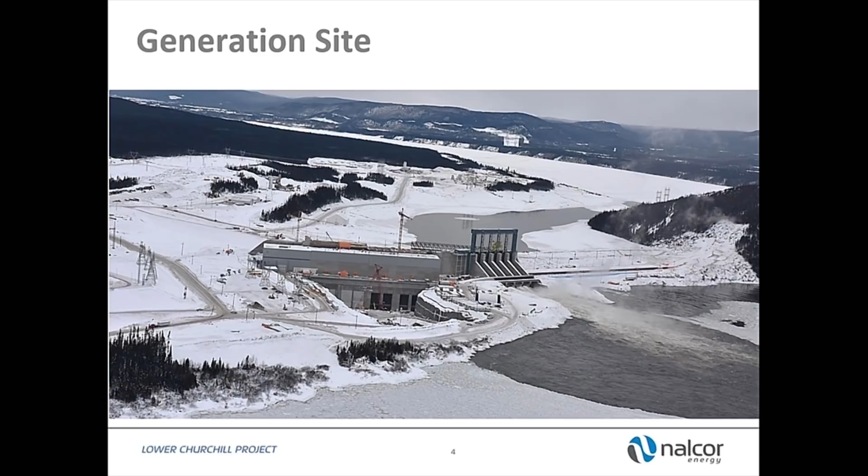So this is 30 feet below the level of the river. The river is about an elevation of 4 or 5 meters above sea level. As you see it now, the water's been backed up just above the upper falls, to a level of about 24 meters, 22 meters, where it's starting to build up back into the river and on the North Spur.

People think the North Spur contains all the water. It doesn't. Half the head is from here to here before it even backs up into the North Spur. But this was a natural flow. It's been diverted, which allowed us to work in the river this year. We've done that. We're ahead of schedule.

The other thing I should point out, there's a lot of water going through this river. There's about 30% more than goes through the upper Churchill because there's tributaries downstream. But the head is very low. The head in the upper Churchill is about 1,000 feet. Here it's about 100 feet.

When this reservoir is full, the upper level will be about here, and the lower level is right here. It's 100 feet. So when this is finished, this plug will be removed. The water will come up to about this level here, and it will be coming in through the turbines and being discharged. So it's a very low head plant, very high volume, as contrasted with the upper Churchill.

The flooding is very little. You can see the banks of the river very high on the other side. You can also see where there's been slippage, and there's basically sand and soil. This has been giving away since the last ice age, thousands of years ago. I'll show you some pictures downstream a little later. Very little flooding.

Now, the capacity of this plant: there are 4 units of 206 megawatts each, for a total of 824 megawatts. That's the maximum it can produce. It won't be producing that 24 hours a day, 7 days a week, 52 weeks a year. On average, it's going to produce 4.9 terawatt hours of energy.

There's been total confusion between capacity and energy. There's 8,760 hours in a year. If you multiply that out, at 100% capacity it would produce over 7 terawatt hours. So on average, it's going to operate at about 550 megawatts. It'll operate at full capacity probably in the spring freshet, because 30% of the flow comes in downstream of the upper Churchill, which there's no control on.

The control is on the upper Churchill. In the winter months, Hydro-Quebec wants us to run that full out, and then later on in the year we cut back. So that will dictate how we operate on a day-to-day, week-by-week basis.

Just to remind you of the sanction number, the number I gave you last year, which is still the number I'm using. Remember that initially we're basically 2 years behind on the power, and also that Emera is entitled to about 20% of the energy for 35 years because of the Maritime Link, with an additional 5% for the first 5 years. Out of this 824, they're entitled to about 165 megawatts off peak. So when the power is at most, they're entitled to about 165 megawatts, which works out to about 1.4 terawatt hours. You should also note that this is not new capacity to the island.

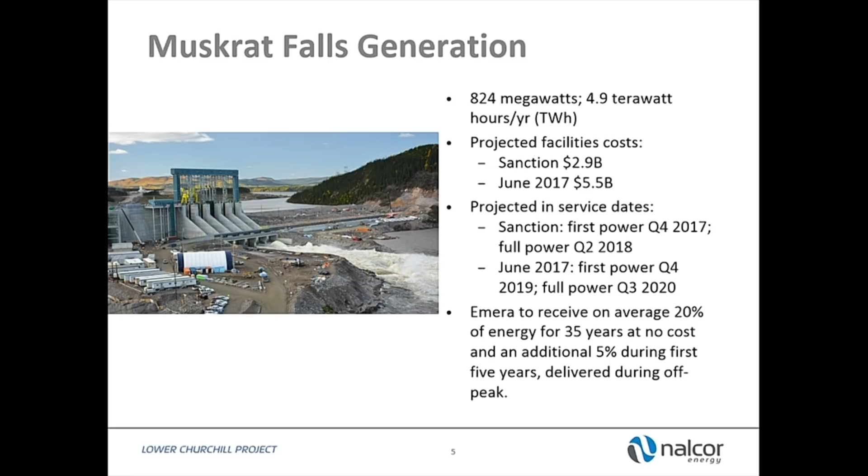The first thing is there are line losses. There's about 70 megawatts lost transmitting from the power plant to Soldier's Pond. Then you've got the 165, 170 megawatts going to Emera. And we're shutting down Holyrood, which is 490 megawatts. Holyrood, on average, probably produces 1.5 terawatt hours of energy in an average year. So we're replacing a thermal plant with a hydro plant. Net, you're probably only gaining about 100 megawatts in terms of capacity. You're going to gain a hell of a lot of energy, you'll see later, but there's only 100 megawatts of capacity, which limits the value of the energy you're selling because you can't sell it on peak normally.

It also means that while we have a lot of energy to sell, we can't bring in these big processing operations, the Bitcoin mining things, which operate 365 days a year and use a massive amount of energy but also require capacity. We have to target what we're going to do with the excess energy to maximize its value.

So what have we done last year? North Spur, we'll talk about later on, but the work is finished there. The South Dam, which I talked about earlier, you can see it here fairly clearly. There's an earth-filled dam, you can see the top, you can drive a truck across it, which you do now to get over here. That's done. The powerhouse is enclosed. The boom has been put up for the winter and for safety. The North Dam is 40% finished, ahead of schedule and within budget. It's been a great year. Overall, we're 78% complete.

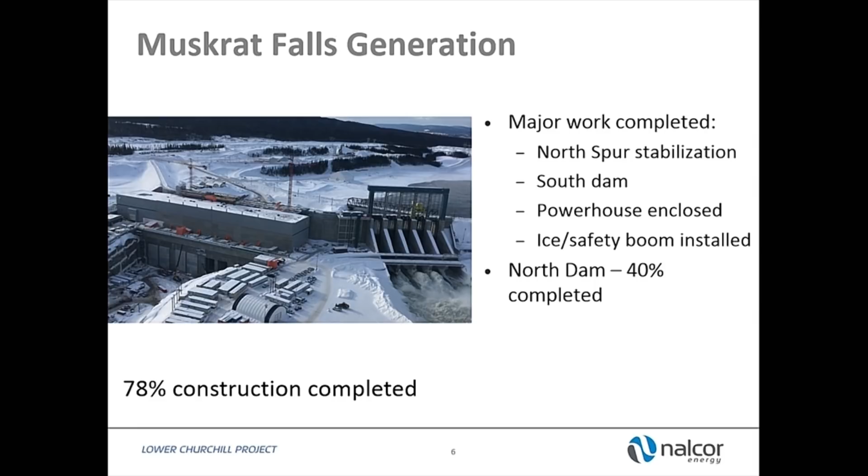What we're seeing now is a transformation. Up to this point, the big focus has been these big outdoor civil works: pouring concrete, putting up big towers out in the swamps, stringing lines, blasting rock, moving soil, all exposed to the elements. The only piece left like that now is the North Dam - hang on, let me go back - which is not in the critical path, has a schedule, no problem. So we're transitioning from those big civil works out in the cold, exposed to the elements, to putting equipment in, doing terminations, and testing things inside. Like in the powerhouse now, the biggest part is putting together the turbines and whatnot. Yes, there's some concrete, but we're working inside, and even though it's, say, 0 degrees Fahrenheit outside, it's 10 degrees Celsius inside.

The other work is in the terminal stations inside. A big transformation - our workforce peaked, and we're going from 5,000, maybe down this year to about 1,200. The camps are no longer needed.

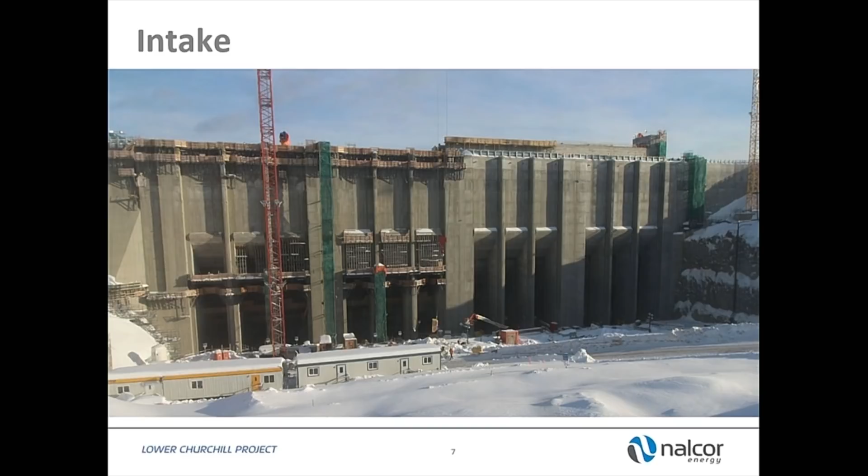Now, just to show you what this is all about, this is the intake to the powerhouse. There's actually a big hole down here. They're still doing some work up on top, not in the critical path, where the gates are - these are the gates which open and close to let water go through the turbines. When the reservoir is filled, the water will probably be up to here. So you're looking downstream now at the intake. Now you're downstream looking up, back where that berm was, protecting from the river downstream.

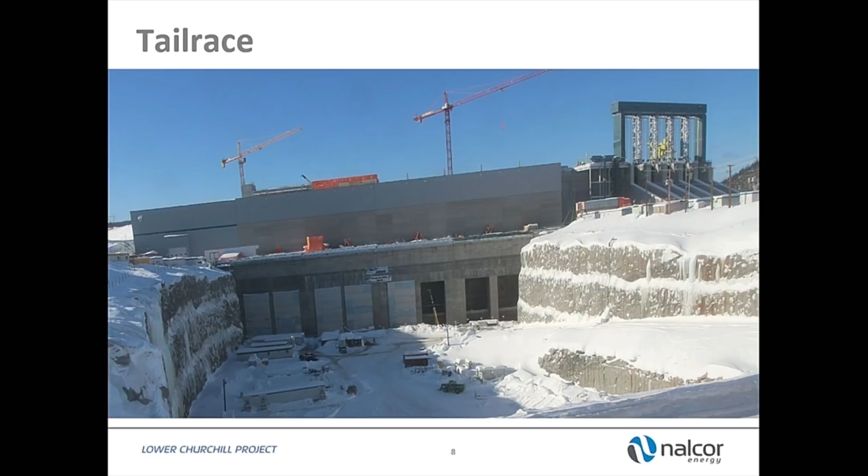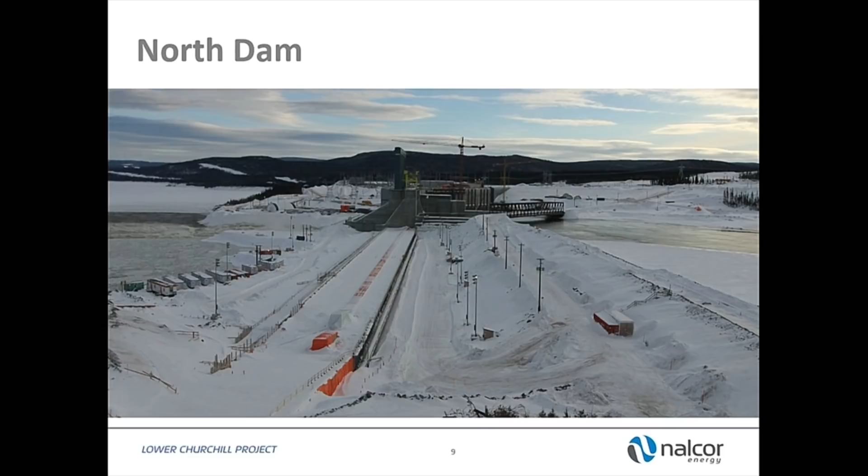Now we're looking inside. This is inside the powerhouse. There are 4 units that I told you earlier. Unit 1 is here. You can see 2, 3, and 4.

This is Unit 1. You're installing the liners into the spillway. The turbines will go about right here in this one. So they're working on all 4 now inside.

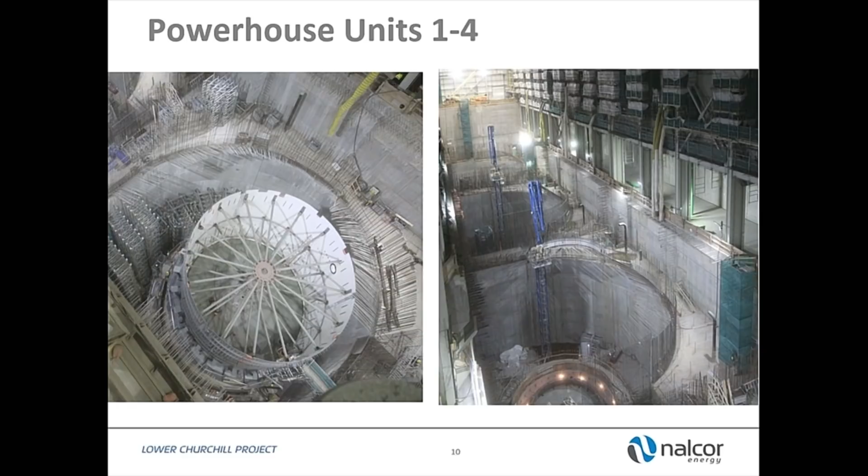It goes back and forth between the 2 contractors. Andritz, the turbine manufacturer, installs their liners and whatnot. Astaldi comes back and pours cement, and they hand it back to Andritz. Back and forth, back and forth. But it's inside, under control. They're working on all 4 units.

What's that? I think right now we're up to 22 meters. We're going to go to 39 meters. Say 50 feet. The water retained behind the North Spur is about 50 feet.

And it could have flooded the works. It didn't, and now we're in good shape.

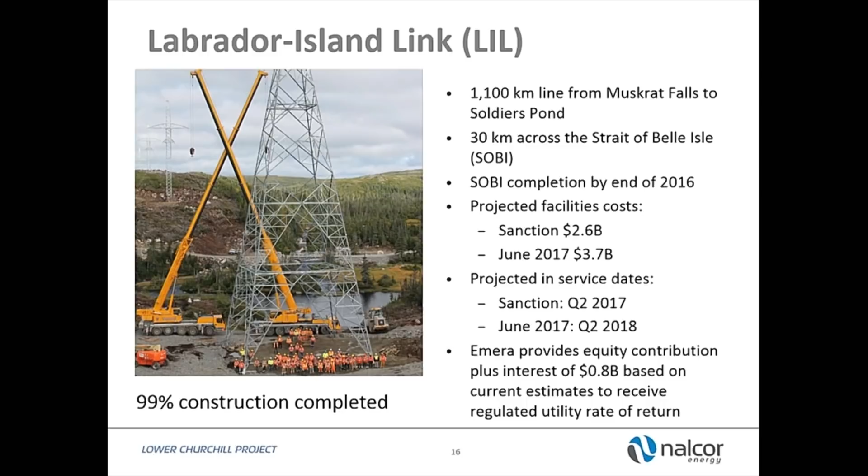I think this is the last tower. You can see the tower's size relative to the people. These are huge towers. You've seen them going across the island. There's two main lines, DC, along with some grounding wires and whatnot, and communications cables.

These are solid-state converters, which means we have a lot of software, which is one of our big risks now. We have people in London, England right now, as we speak, working on this. Software risk is a big risk we face in the next few months. Will the software work? We've been doing a lot of work on it, but you see how our risks have changed. We're no longer worried about working out in the snow and the rain. We're working inside, terminating things, working in offices, getting billing software.

They're like flywheels, electrical flywheels in a sense. They provide the momentum to keep the system stable. We're also going to use at least one of the units at Holyrood as a synchronous condenser to provide more stability — we might even get two. But they're not going to generate energy, they're just going to keep spinning around and give what's called reactive power, stabilizing the system.

Not only is this finished, it's energized. So all the lines coming from Bay d'Espoir, Western Avalon, and Holyrood are now coming into here and into the city. This has been turned over to Newfoundland Labrador Hydro. This is a control area here — this is operational. This is being finished as we speak.

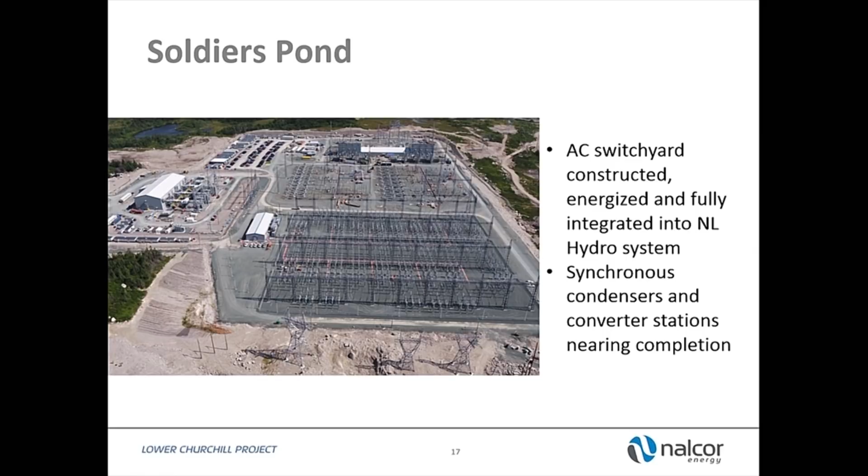So the power comes in, is converted to DC, 350 kV, and is sent to Soldiers Pond outside of St. John's, going across the Strait of Belle Isle. Again, we're in the process of energizing and switching these areas.

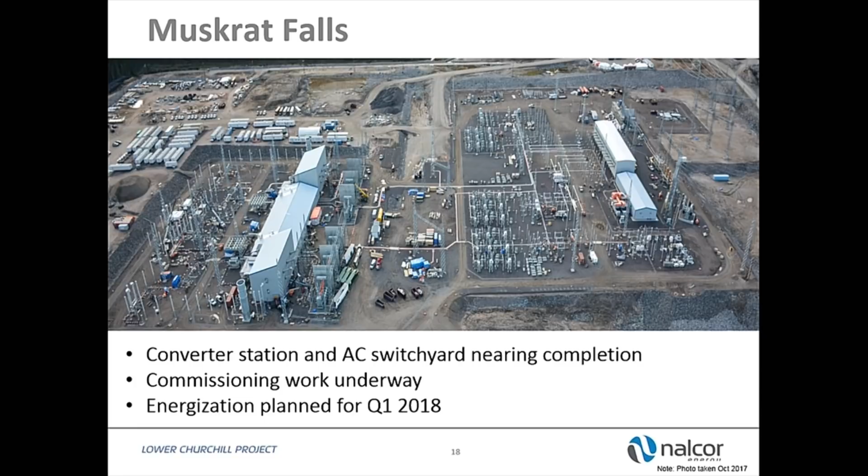Going back to the connection from Muskrat to Churchill, again, this is finished. What we did actually last fall, we weren't ready to energize the whole thing, but the old line going from the Upper Churchill to Goose Bay was falling down, and we jury-rigged part of this line to feed from Churchill down to Muskrat Falls, and we're actually using it to feed into Goose Bay. As you'll see later on, we're now going to, in the future, feed Goose Bay from Muskrat Falls. Again, the numbers I gave last year are still valid.

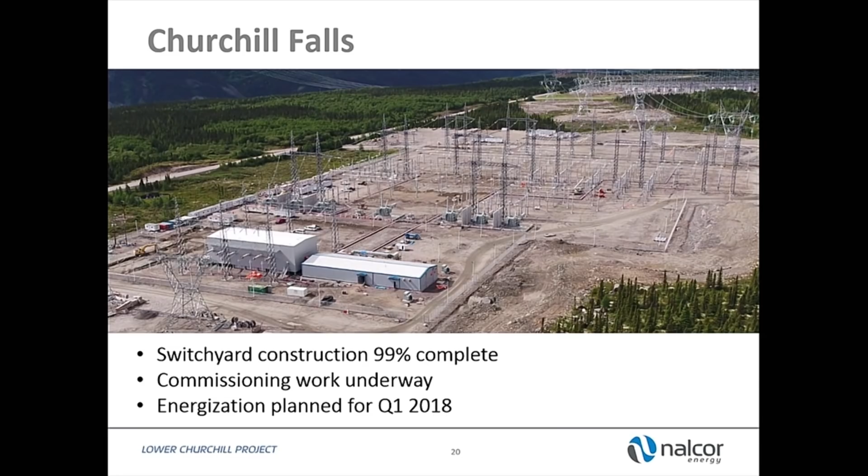This is the switch yard up at Churchill Falls. This area up here is where the existing high voltage lines, the 735 kV AC, go into Quebec. We had to tie in that system, bring it over here, convert it to the 315 kV we use on the line going down to Muskrat. You see the towers going down here. We're in the process of energizing this now and starting it up.

Maritime Link. It's being built by Emera, and I won't say it's finished, because we tried to use it the other day and they had trouble with some of their machines. We wanted to start bringing power in now from Nova Scotia.

Again, to save money - they have coal-fired plants, they can generate a lot cheaper than we can using oil at Holyrood. We have an agreement that we'll bring the power in and split the savings for as long as we need this. But right now they're in a startup phase - some of their equipment has to be replaced. So it'll be another week before we can do that. But within a week, we'll be buying power from Nova Scotia and saving the money.

This is a 500 megawatt line. There's two cables, 250 each. I'm going to have to speed up.

No question, a lot of the contractors were not used to working in our environment. They're good contractors - Astaldi is a world-class contractor. He had never worked in this environment before; he'd built hydro plants in South America and Chile. But as we've seen this past year, once they got the experience and the right people working together, we achieved remarkable results. Nobody could have done better than Astaldi this year. Nobody.

Then the poor execution - we all talked about this dome and everything else. Yes, that was a fiasco, a reflection of some of this. But you know what? They paid for that.

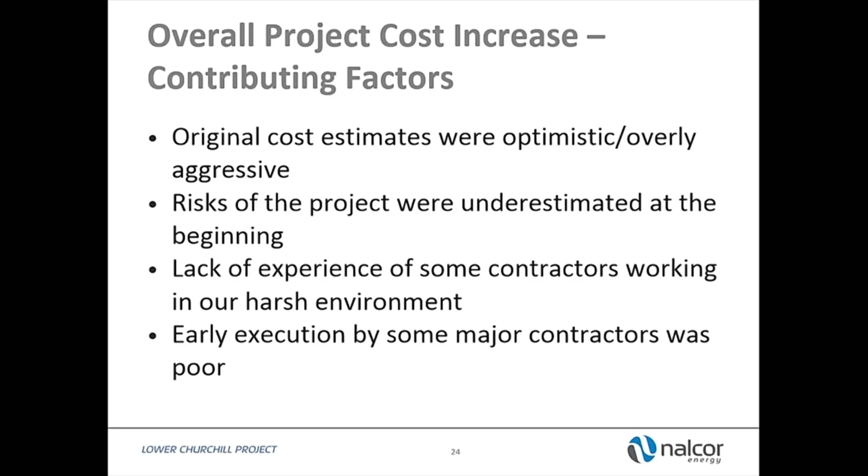We paid for it at the time, but when we revised these contracts to complete it, one of the principles - it took a long time to establish. We started with Astaldi, we've done it with the other contractors. There are two basic principles. I said it took three years to dig this hole, don't think you're getting out of it anytime soon. That's one. The second principle was we're going to share the pain. I'm sharing the pain, the people of this province are sharing the pain, but you're sharing the pain too. It took time to establish that, but they did.

It's true that some of these contractors have lost hundreds of millions of dollars on this project. So if you've got an image of people at Nalcor or contractors going around with little black masks on with bags of money, forget it. When a project like this goes bad, almost everybody loses, except for lawyers and accountants. And they're doing rather well.

There's been more studies, more inquiries, more supervision on this than I've ever seen. I have about seven separate boards of directors - there's so many of them I had to bring them into an auditorium like this and just give one presentation, otherwise I'd spend all my time talking to boards. Then we have the Oversight Committee, the Environmental Assessment Committee, ministers coming in, civil service coming in. This has been the most over-governed project ever.

And you know what? Everybody focused on those little pieces. Nobody saw the big picture. Nobody. Nobody suggested, when I came in, that we split this project in two for better control. Nobody. Nobody suggested to me we should get the transmission line back on stream so we could make money for two years before Muskrat comes on stream. Nobody - they were focused on those little pieces with their microscopes on. That's the big picture.

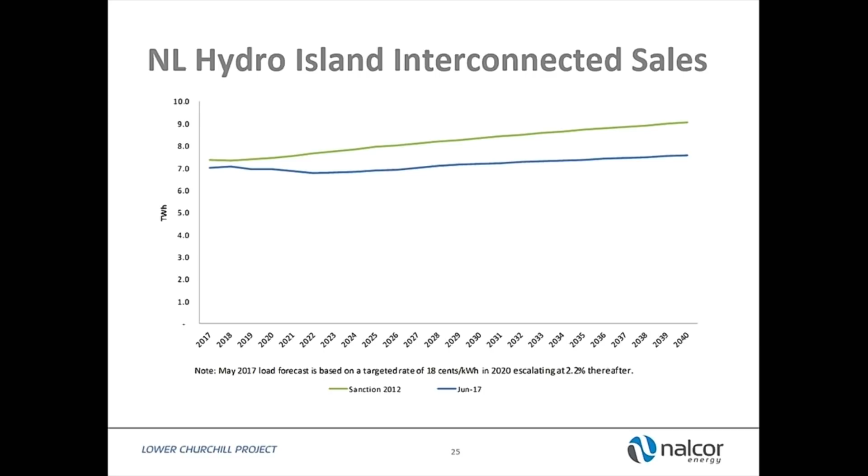The big assumption that went wrong here - another big assumption went wrong. And I've said all this before, by the way. This is nothing new.

I said that the big assumption in the Upper Churchill was that the energy prices back in the 60s, which were low, would stay low forever. That was the big fallacy, the assumption in the Upper Churchill. When this deal was done, the underlying assumption was that the high energy prices of 7 or 8 years ago, which were high back then, not only would remain high, they would continue to increase - which meant that as you went to sell this energy, you would make all kinds of money.

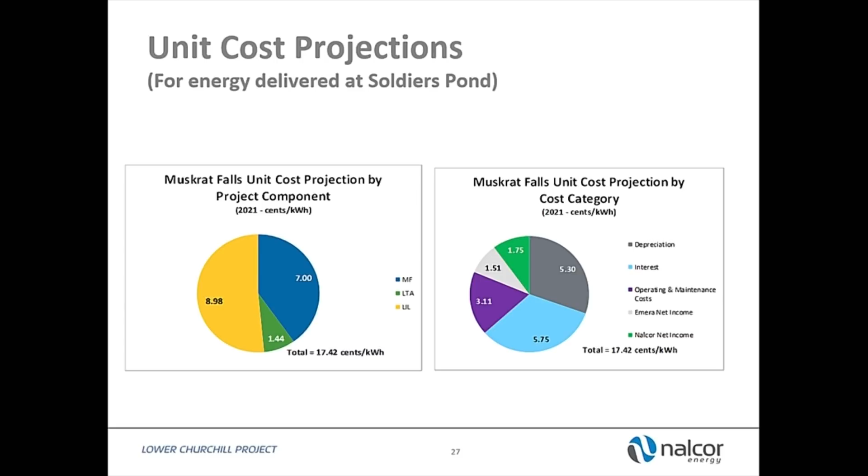It's got nothing to do with the fact that this was a really expensive generating plant. Yeah, it didn't help, it had cost overruns. But you got a contract that bound you in for at least 35 years, and you're stuck.

So what does this translate into? So when this thing was sanctioned, this was the estimated costs. Don't forget now, when Hydro is going to take the energy from Muskrat Falls, but it's got all their cheap sources on the island, so it all gets blended in, and Newfoundland Power has got to get its costs paid.

So when you add all this up, this produces a rate of around 22, 23 cents, which is what I said the first year I was here. Changed a bit because we got the federal loan guarantee, brought it down. We had a cost increase, certainly the contractors brought it up, but basically back where we started.

Don't worry about this out here - where's my pointer gone? It was assumed that Nalcor would make more profit in the future. This is all pipe dream stuff.

So when I took the job, my mandate was to do two things: bring Muskrat Falls under control, bring it to a good finish. Do what we can - there's no question we had to finish it. We were about 80% committed. You just can't go back and say, oh, don't let my contract, give me all my money back. Even if you did, you're still going to replace Holyrood. You had to finish it - there's no other way of getting through it.

So what do we have to do? We had to get more money - a federal loan guarantee. Otherwise the province is going to go bankrupt, really. That was done.